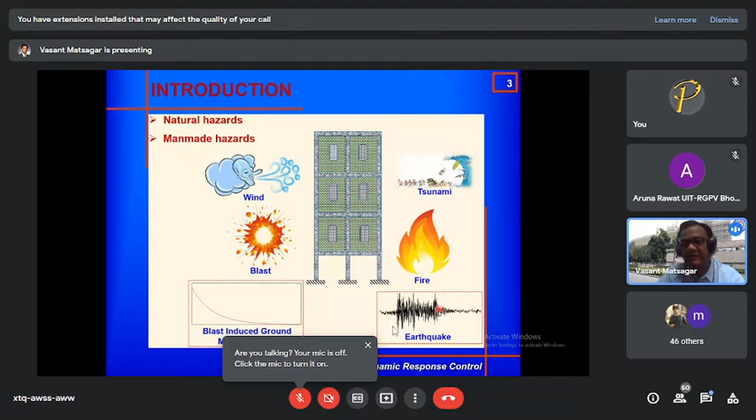However, before going there, I would like to mention clearly that these dampers or devices are used in structures not only for controlling response against earthquake-induced and wind-induced vibrations, but even for ambient loading conditions as well.

What are those ambient loading conditions? For example, when there are construction activities going on, the structure may experience some ambient vibrations. Or when there is a metro tunnel passing below a building, the building may experience vibration when the metro train passes by. Or if a heavy vehicle is passing on a nearby highway, the structure may experience some vibrations, and these are mostly called ambient vibrations.

So in addition to controlling the response of the structure against devastating earthquakes, it is also important to control the response—meaning minimize the response amplitude—against these kinds of ambient vibrations. I have already talked about windborne ambient and windstorm conditions, as well as earthquake conditions.

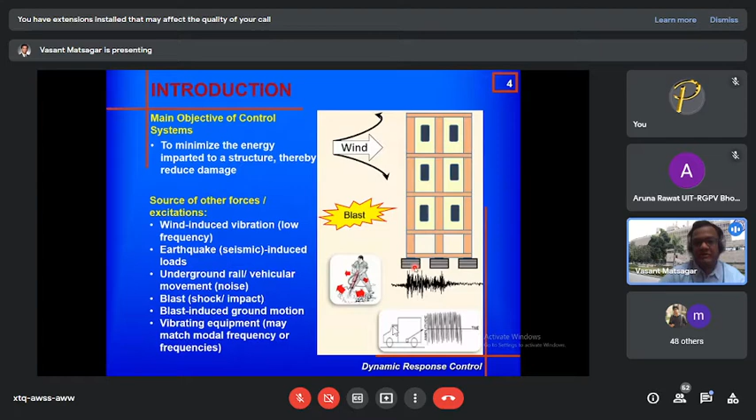Apart from that, I have talked about construction or transport activities that may cause vibrations in structures. There could also be surrounding industries and machinery that may cause vibrations, either from surrounding parts or within the structure itself—for example, diesel generators. These devices may cater for some of the forces induced on the structure because of these different sources of excitation.

So we categorize our excitations in a different manner, and then we write the governing differential equations for dynamic equilibrium of the structure, which essentially contain the mass, damping, and stiffness components. I'm still not at the matrices—I will talk about them in a little while.

However, in most structural dynamic analysis and design, we deal mainly with three matrices or three kinds of forces: inertial forces, damping forces, and elastic or stiffness forces. These days we do not call them elastic forces because we may have some inelasticity as well. On the right-hand side of the equation, we have the excitation forces.

Now, within this, mass and stiffness are typically explicitly known. This means we can calculate the mass of the structure by taking the volume multiplied by density. Stiffness is also explicitly known, meaning we can calculate it based on its material and geometric properties.

For example, if it is a column, we know the cross section. If it is a rectangular cross section, then using the moment of inertia bd cube by 12, and its length, depending on the boundary conditions, whether fixed, pinned and so on, and what modulus of elasticity it has, we can explicitly calculate the stiffness and subsequently the stiffness matrix. So both mass matrix and stiffness matrix can be calculated.

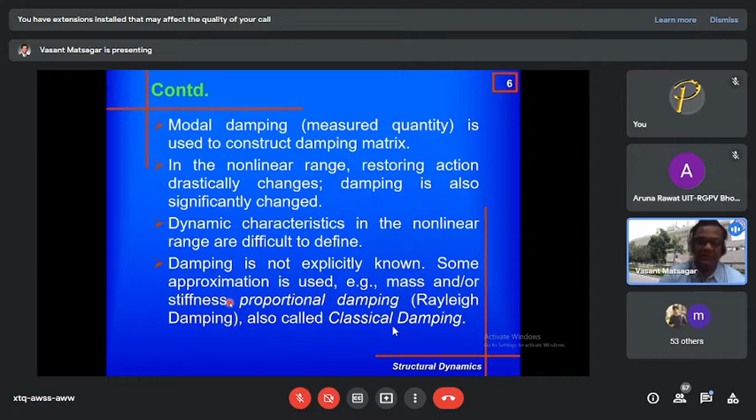The structure becomes non-classically damped. If we do not add that external damping, then it is called classical damping. This is something classically known, that it is assumed classically that the damping in the structure is proportional to mass and stiffness, until we add the external damping. So this is something we should know from structural dynamics.

However, in addition to that external damping, there is some damping coming either from the soil structure interaction part, or if you have combinations of structures. For example, you have bottom floors made of reinforced concrete, and after that one has added new floors, but those new floors added are made out of steel, so it is a hybrid structure. You have combinations of two different kinds of structures.

And thereby the mass and stiffness proportional damping, though it is present there, it is still in the category of non-classical damping, because the damping levels are different. Whereas reinforced concrete gives a damping level of about 4 to 5%, depending on how much cracking has been induced, the steel structures can give up to about 2% of the damping. So there is a difference in the damping in the structure.

Now that has a direct effect on the frequencies, or the modal values, or the mode shapes of the structure, which are the natural properties, because these are dependent on the mass and stiffness, and from that we calculate the natural frequencies of the structure, modal frequencies, by solving the eigenvalue problems. After that, we calculate the damped natural frequencies, and those damped natural frequencies, depending on how large the damping is, are affected, meaning they are shifted because of the presence of damping.

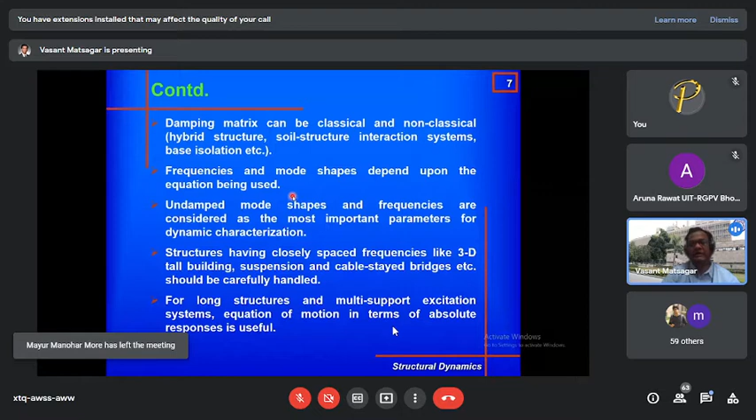Again, if it is a long or tall structure, the classical theories of structural dynamics based on the lumped mass approach may not be directly applicable, and we may have to tweak the equations of motion. So to summarize, there are different kinds of approaches available for developing the governing differential equations and solving them for response evaluation of structures, categorized into lumped mass systems and distributed mass systems or continuum systems.

In most cases, we still follow the lumped mass system. However, for some important structures, we may go with the continuum or finite element approaches, especially when we have soil structure interaction kinds of problems, or liquid structure interaction kinds of problems. There, the lumped mass approach becomes more approximate, and the continuum approach or finite element based approaches are more suitable.

In case of lumped mass approach, typically in buildings, the mass is lumped at the floor level, and the mass of the columns is added to the floors so that the columns only provide stiffness, while their mass is considered lumped at the floor level.

Even for a three-dimensional oriented building, where members are in all three directions of the structure, they can be modeled at each joint or node, and thereby the inertial forces are developed at the nodes while the stiffness forces are developed within the members, either in the vertical lateral load resisting elements, or in the beams.

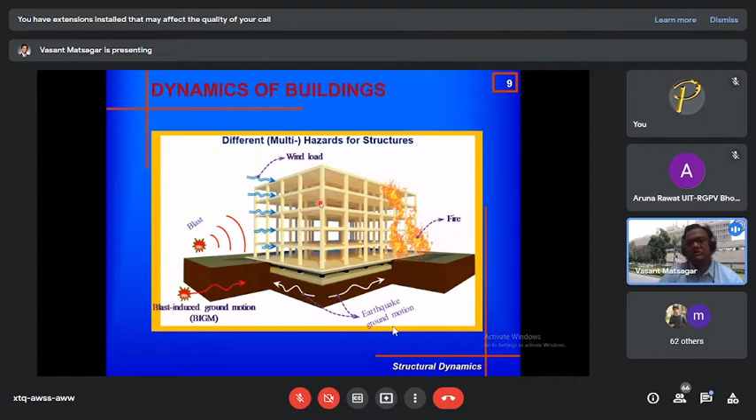For this kind of system, we develop the equation of motion for a multi-degree of freedom system under either base excitation or mass excitation. When I say base excitation, it is from the seismic case, and when I say mass excitation, it is from the wind case. Please note that in both these cases of dynamic excitation, the governing differential equation remains almost exactly the same.

The reason I'm saying almost exactly same is this: in case of seismic excitation, this is the inertial excitation, whereas in case of wind loading, it is a direct load which is applied at the nodes, if it is a lumped mass system.

Now, this equation, I'm sure most of you are familiar with. When we write the equilibrium equation for the entire structure, the right hand side is 0 in case of earthquake, because here we are talking about the absolute acceleration. That absolute acceleration consists of two parts: the relative part of the acceleration and the ground acceleration.

When we split this into two, there are two mass times acceleration components, one of them related to the ground acceleration. If we take that on the right hand side, it gives the negative sign, and then we rewrite that equation in this form.

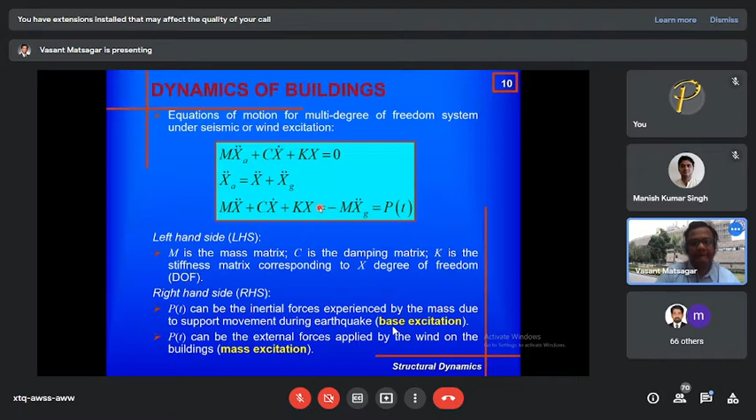Now, for long structures, typically such as bridges, there might be different kinds of excitation experienced at different piers, because the length is larger. There could be a 100-meter or 200-meter long bridge, and thereby we cannot take the same earthquake excitation received at each pier location.

In that case, we may change the excitation depending on how the ground is and how the attenuation is happening. So we have to change our equilibrium equation in a sense that we have different kinds of excitation received at different input points to the structure, different supports to the structure, such as long bridges or even long plan buildings, and that is called multi-support excitation.

Now, from this, if we take out the terms of the external excitation and damping, what we are left with is the natural properties or inherent properties of the structure, such as mass and stiffness. They are independent of the external excitation. Now, if we express it in the form of an eigenvalue problem and solve it, what essentially we calculate are the modal frequencies and mode shapes. Now, why are they important to us?

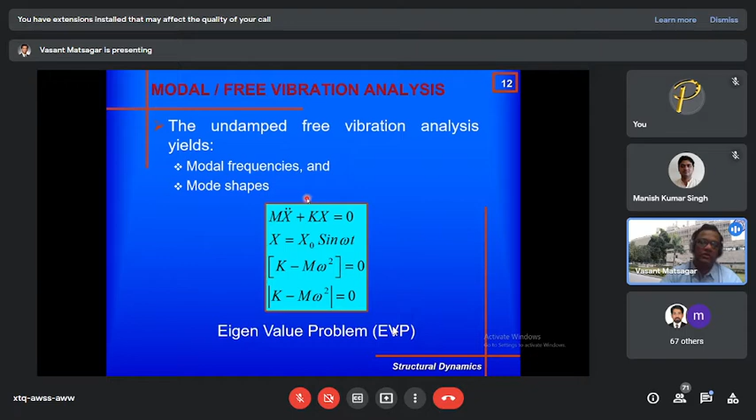Or when we add, let us say, a tuned mass damper on the structure, there is change in the modal frequencies and the fundamental mode. If we are controlling the first modal response, then we split into two modes and we have different modal quantities corresponding to the first and second mode. So that we will see in the subsequent slide.

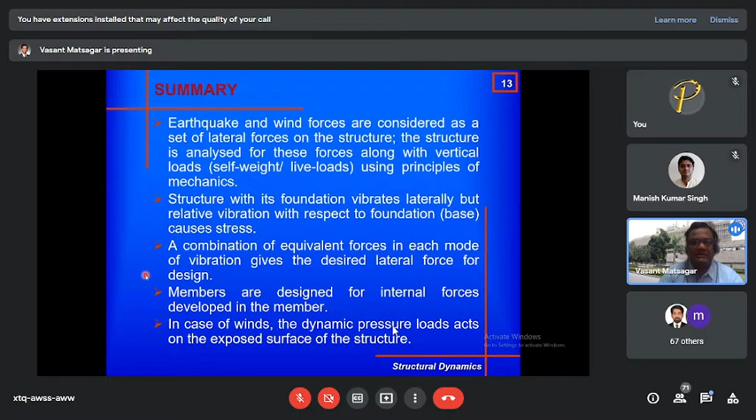So mostly I have talked about the base and mass excitation and how we calculate these different quantities such as mass, damping, stiffness, and then our objective is to control the dynamic response or vibration response of the structure. So most of these things I have already talked about. This only summarizes the structural dynamic concepts.

Now, there are two parts again, the mass excitation and base excitation. In case of mass excitation, we calculate what is the load acting at different nodes if it is a lump mass modeling approach, by multiplying the pressure applied by the wind on an exposed surface and then calculate the force acting at that level. Typically, it has this kind of a profile because of the friction with ground and trees that are there beneath. But otherwise, we get almost the maximum velocities here, which are free velocities, and thereby we get uniform high pressures at the top.

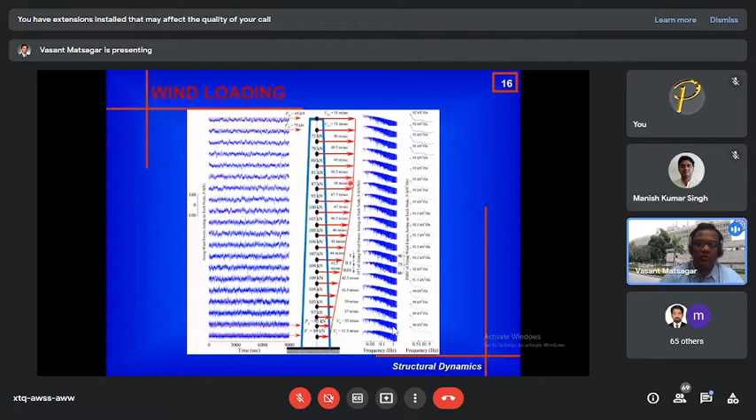So this is especially important for tall structures. For low-rise structures, though, they are more prone to earthquake rather than wind, which is the focus of today's presentation. So in case of earthquakes, there are different kinds of earthquake ground motions depending on what site we are talking about.

So all these characteristics of the accelerogram of earthquake ground motion have direct effect on how the structure would respond. Typically we quantify it in three terms. One, the maximum acceleration in an earthquake first. Second, what is the frequency content? For example, here the frequency content is lower as compared to this. There are a lot of high frequency components involved in this excitation. And the third and last one is the duration.

Now, these days duration is also becoming important. Earlier, it was not per se a design parameter, but now there are certain areas where long duration earthquakes are becoming more and more prominent. For example, in Japan, they are expecting an earthquake which may even last for 15 to 20 minutes or even maybe 30 minutes, half an hour. So that becomes quite important because there is a lot of to and fro motion happening.

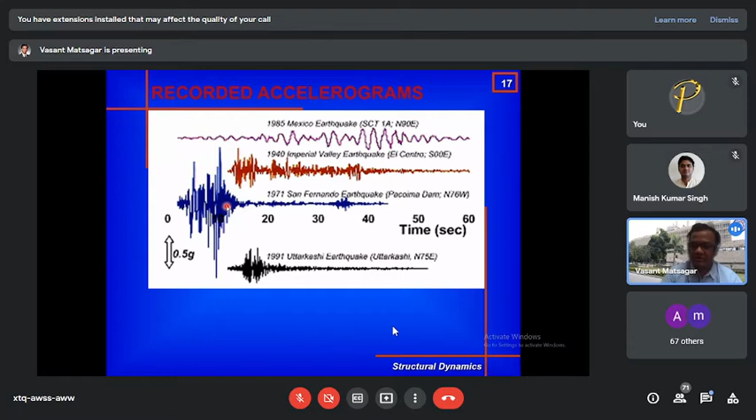So if we have a look at our Indian standard codes, and for that matter even worldwide also, most of them do not much worry about the long duration earthquake. However, indirectly these codes and standards deal with the frequency content. I am saying indirectly, but they directly deal with the earthquake intensity measured in terms of the peak ground acceleration. So the intensity parameter that we essentially take into account in the structural design is the peak ground acceleration. So whenever we have some time history, we focus on the peak ground acceleration and then start designing our structure as well as the response control devices based on how the structure is responding to a given intensity of an earthquake.

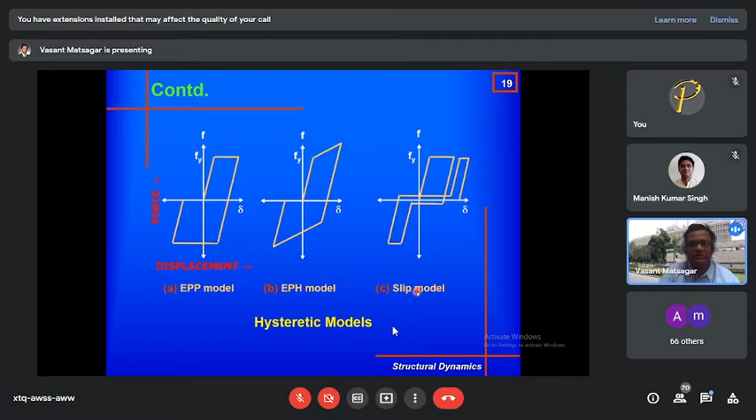Now, how do we incorporate these devices in the structure? First, I'm showing some failures, and then we learn from them and how we protect the structures by adding external devices. What you see here is a bracing system which is conventionally put in place.

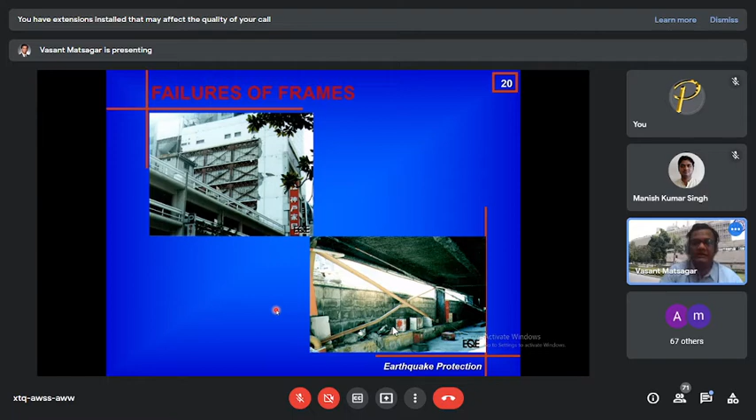In most cases, in the rural parts, we have non-engineered structures built by masons or those not trained in construction, and during earthquakes they experience catastrophic failures, causing a lot of death toll. Even some so-called engineered structures experience collapse because, though they are engineered, the best practices of earthquake-resistant design have not been followed in their design and construction.

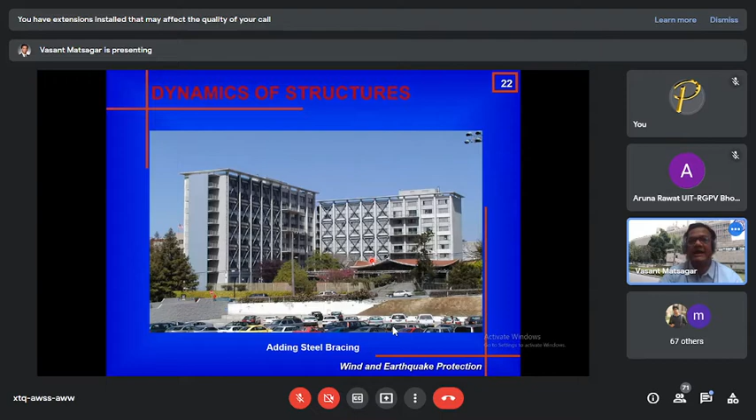Whereas if we see structures in seismically advanced countries such as Japan or the US West Coast, California region, they have adopted the best practices in earthquake-resistant design, and by constructing those structures to be earthquake resistant, they are able to save both human lives and loss of property and business. This is done either by using conventional approaches of earthquake-resistant design, or by using some of the advanced devices, which is what we are going to focus on today.

So how do we control the response of the structure? We do that either by increasing the flexibility of the structure in the seismic case, so that on the response spectrum, we move towards the part where the spectral ordinates are diminishing or lowering down.

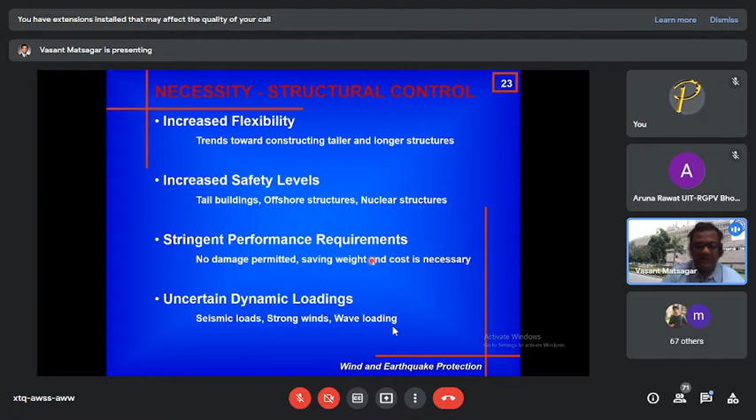In addition to that, for ambient cases and earthquakes that are not so intense, meaning their PGA is lesser, we may also look into serviceability conditions, whether serviceability is met or not. We also have predictive models wherein we check the possible earthquake excitation at different time steps, and for that we design these response control devices so that they help not only during the extreme earthquake case, but also in ambient conditions. There is a lot of uncertainty involved in this, which we do take into account. A detailed discussion on that we will have sometime later.

So focusing particularly on the fundamentals of vibration control and how we use them in our buildings and structures.

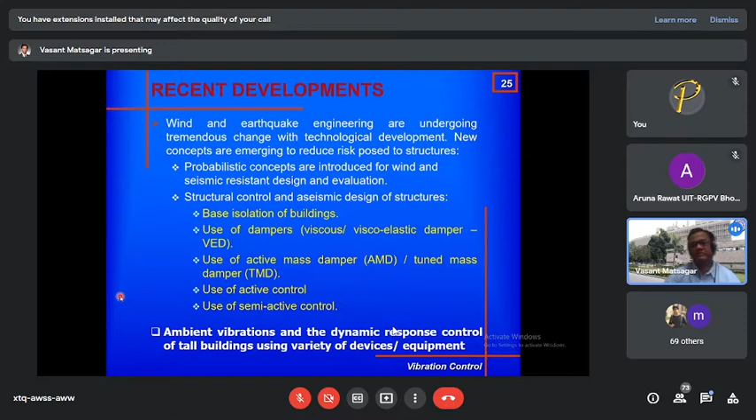Typically, we incorporate some device in the structure in the form of either a bearing or some dampers, like the shock absorbers we see in automotives, cars or bikes. Or we put tuned mass dampers on the structure. All these passive devices, having no external input, such as base isolation, dampers, or tuned mass devices, can be converted or put into semi-active or active mode as well - I will talk about that in a little while. These devices may function for both purposes, or separately, for ambient vibration conditions or extreme vibration conditions, either because of earthquake or wind.

Now, these days we worry about the performance of the structure during different levels of earthquakes, which falls in the category of performance-based earthquake design. So even in structural response control, we are in a position to look into what are the different damage states and what performance level threshold we are achieving by incorporating these devices in the structure.

Typically, for lifeline structures such as hospital buildings, we always anticipate that it should have operational level of performance. It means during and after the earthquake, the hospital should remain functional without requiring any maintenance or rehabilitation. So even for hospital buildings, we in a way do not prefer immediate occupancy as well.

What immediate occupancy means is that during the event, ongoing activity or excitation, occupants of the building are evacuating, going out. However, after the event is over, they come back and start using the structure without requiring any rehabilitation. However, just imagine for a hospital building, the patients residing there - depending on their health condition, they may not even be able to go out of the building. They may just remain there. It will take a lot of time for them to evacuate, and by then the earthquake might even be over. So for hospital buildings in particular, it is recommended that we have the operational level of performance.

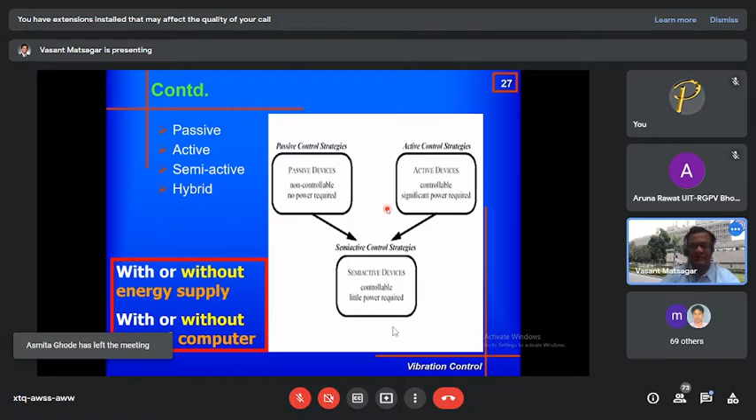Okay, I have already covered this part, so I will go ahead.

So there are different kinds of vibration control devices available, such as base isolation. Again, there are different schools of thought, particularly in Japan - they do not consider base isolation as a vibration control device, but in my opinion, base isolation is also a vibration control device. However, there is no difference of opinion insofar as viscoelastic dampers, tuned mass dampers, or multiple tuned mass dampers are concerned - they are all vibration control devices.

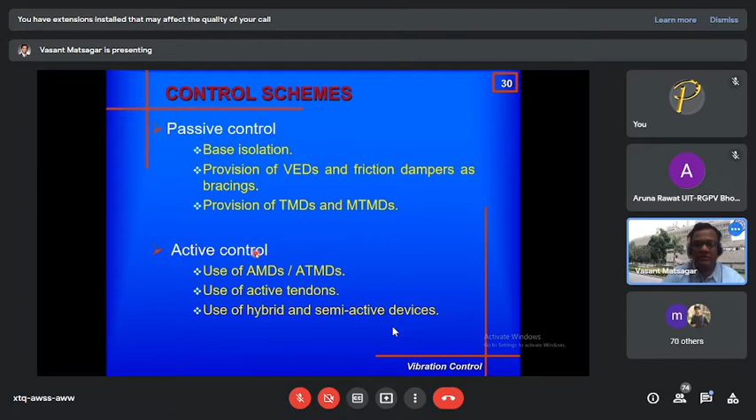If we have their inherent properties used in vibration response control, then they fall in the category of passive control. If we have their properties changed during excitation as per the requirements, then they are called active or semi-active control devices, depending on what power input is required.

And typically when you have large energy dissipation, essentially you are talking about nonlinearity in the structure. The more the nonlinearity, the more the area under the force deformation loop, the bulkier the hysteresis loop, the more the energy dissipation and the more protection we can obtain.

Now, that kind of nonlinearity or higher damping can be introduced in the structure in a large number of ways, and it would become a very exhaustive long list to cover all the different approaches. However, some salient names have been taken here, such as tuned mass dampers, liquid column dampers, MR dampers which are magnetorheological dampers, or electrorheological (ER) dampers, then active mass dampers, smart dampers, and so on and so forth. There are a large number of such devices available.

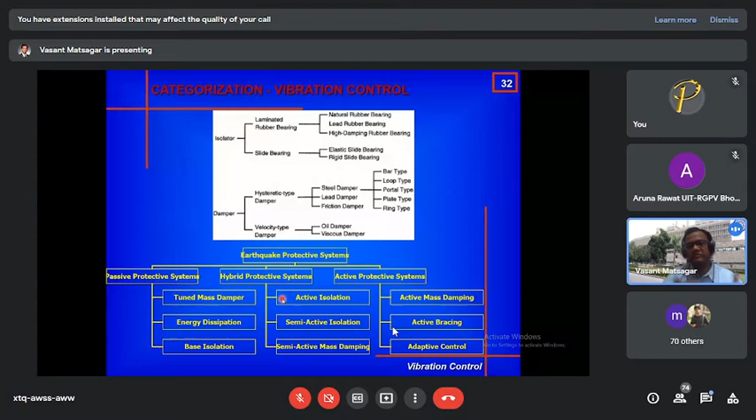Once we choose one particular damper out of these different possibilities, we can design our structure accordingly and see how it responds. While choosing that device, essentially what we are adjusting or manipulating is either the mass of the structure, the damping, the stiffness, or we are not allowing the external excitation force to enter the structure, like in base isolation, or we apply certain external control force.

So essentially, from the structural dynamics viewpoint which I talked about in the beginning of this class, we are playing with the mass matrix, the damping matrix, the stiffness matrix, and the excitation force on the right hand side of that governing differential equation. Overall, what we have in our hand to control the response of the structure is that simple equation.

You have three terms: the inertial force term, the damping force term, the elastic or restoring force term, and the external excitation. You can play only with this, and typically it is better to play with the damping—so in some cases we call these damping devices.

Essentially we do not worry much about the mass, because the mass of the structure remains the way it is, and the seismic forces are proportional to the mass. So typically, in order to reduce seismic forces on the structure, we tend to have lighter mass structures as much as possible, but that depends on the materials we are using.

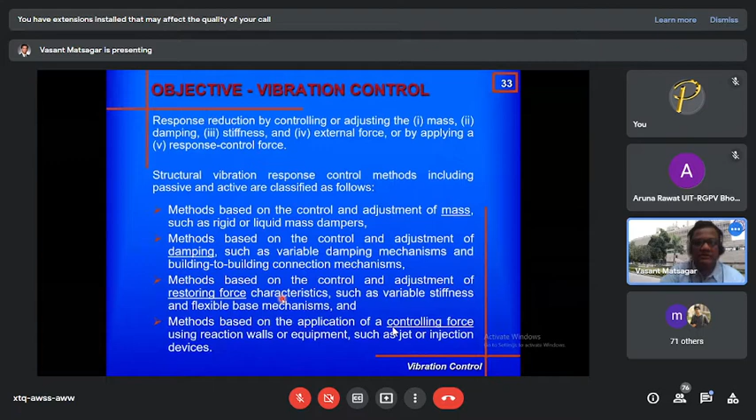But increasing the damping capacity and changing stiffness to some extent are really possible. Avoiding the external excitation from reaching the structure is rather challenging, and applying external force is also very challenging for tall and massive civil engineering structures. So the focus still remains on changing the damping and stiffness of the structure.

The other option is the tuned mass damper. We can install the tuned mass damper at an appropriate location—the most favorable location is at the top of the structure, which experiences the largest displacements.

If that tuned mass damper is fitted with some active or semi-active device, then its properties can be changed during the excitation stage itself, so that we achieve larger response reduction or greater vibration response control. Or we can have some bracing systems or active tendon systems—AT stands for active tendon.

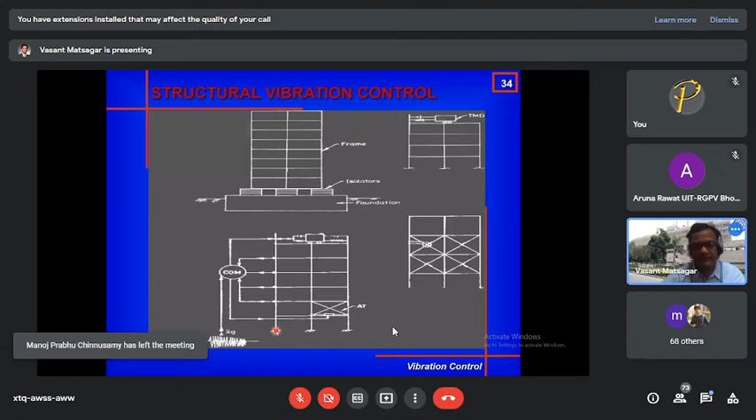These can be simple accelerograms which measure the ground acceleration, xg double dot. In addition, there could be other sensing devices sensing the floor response, such as floor accelerations or velocities. For example, accelerometers installed at the floor level have their measured quantities fed to a computer.

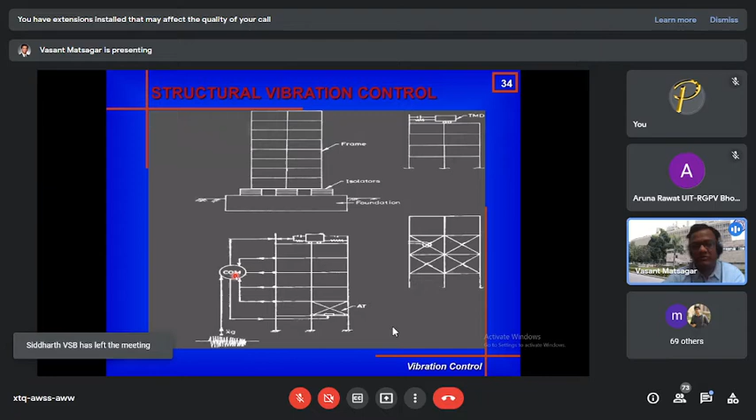The arrow is going towards the computer. Ground acceleration is measured by the accelerograms and fed to the computer. So the computer has received as input the data of external excitation as well as the response of the structure — the floor response of the structure. That is the input.

Based on that, we do some coding. We write a program: given this excitation and these floor responses for a given structure, what should be the control force? We calculate that in real time when the actual earthquake is happening, then give feedback control to our devices dictating the dynamic properties — how the stiffness should be, how the damping should be. Changing the mass during real time is rather challenging.

Because of that change in stiffness and damping, we can further reduce the response of these floors in subsequent time steps. So we give that feedback signal, or control signal, to control the response of the structure by changing the properties of the control device — and therefore it is called active or semi-active control.

Similarly, as you can see here for the active tuned mass damper, we send the signal to the active tendon system and dictate how the tendon should behave — which one should be taut, which one should be slack. For example, there is an actuator here, and we give that signal to the actuator. If this building is moving to the right of the observer, we would like to pull this tendon back, not allowing it to displace further right. This means the actuator will move from right to left, pulling the tendon so the structure is not allowed to go right.

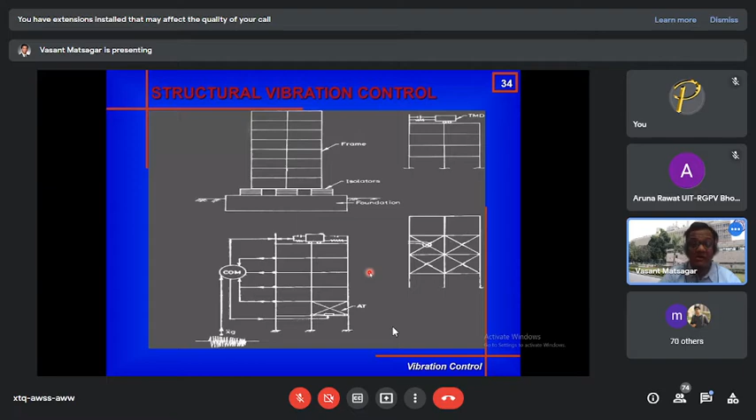Before I go any further, have I been able to explain how this semi-active or active response control works? Because the rest of my discussion on active control will mainly revolve around this. Any questions so far? No quick questions? Okay, I'm glad I was able to explain this with a lot of clarity.

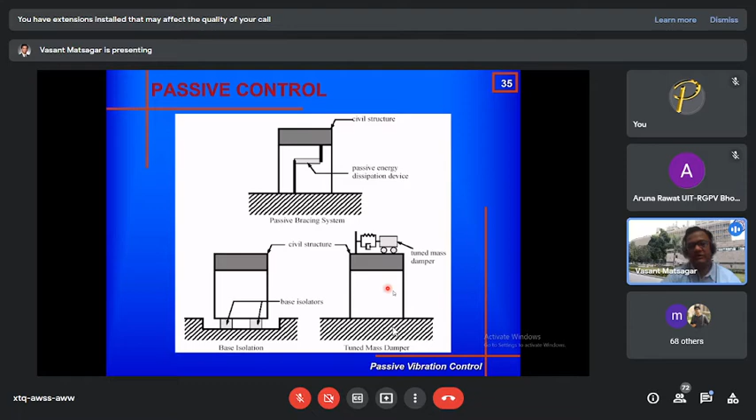These are schematics showing how passive bracing systems, base isolation, and tuned mass dampers are represented and how they function, which we will see subsequently. For any civil infrastructure, we can install energy dissipating devices — passive, semi-active, or active — in the form of dampers internally, base isolation systems to separate the structure from the oscillating ground, or tuned mass dampers installed on top.

So out of this, I will first talk about the tuned mass dampers, then I will talk about the other dampers, and tomorrow I will talk about the base isolation.

Tuned mass dampers are a very classical device based on the fundamental principle of structural dynamics, which is resonance. The parent structure could be a multi-story building or a bridge. When subjected to earthquake excitation or live load, such as vehicles moving, the bridge starts oscillating. That entire structure can be represented as a multi-degree of freedom system, which can be converted into an equivalent single degree of freedom system.

This MCK - mass, damping and stiffness - is representative of that equivalent single degree of freedom system of the parent structure, whose response is supposed to be controlled: displacements, accelerations, and velocities to be reduced. Typically, in flexible structures, displacements are what we need to control. For that purpose, we go with displacement control devices rather than force control devices. Tuned mass damper is one such device typically used for displacement control.

In a tuned mass damper, we have a certain mass installed on top of the structure, connected to the structure by some stiffness and some damping. That stiffness, damping and mass corresponds to the tuned mass damper.

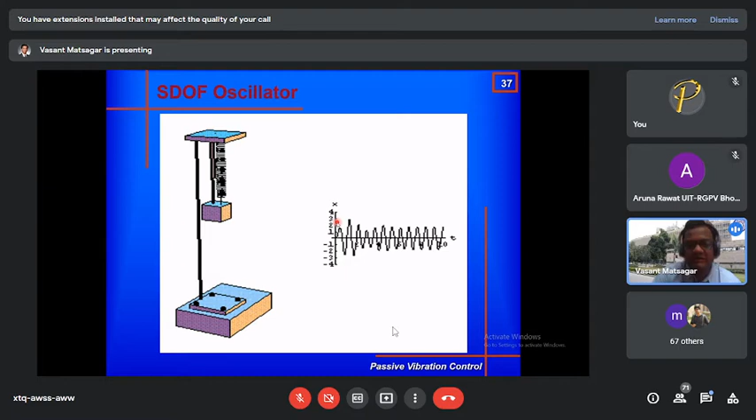Again, this is a representative structural dynamic picture where you have a single degree of freedom system. There is some excitation here in this direction - it doesn't matter which direction for our discussion. This is the larger uppercase mass, and uppercase X is the displacement. There is some stiffness element and some dashpot or damping. Under this excitation, the amplitude in whatever unit is somewhere around 3 units.

Now why does that happen? It typically happens because when this mass is moving in one direction, let's say upward, because of the inertia of the small mass, it tends to move in the downward direction. This means it resists the upward movement of the main mass. In the next time instant, when this mass is going down, because of the inertia, the small mass relative to it will come closer - meaning it is moving upward and applying a force opposite to the motion of the main mass.

Now, because of the tuning, because their frequencies have matched, they will always be working against each other, and there will be a phase difference of 180 degrees. It means if this main mass is going down, the auxiliary mass, the tuned mass damper, will go up. If this is going up, meaning the main mass is going up, this will go down. And it will keep on happening because their frequencies are the same.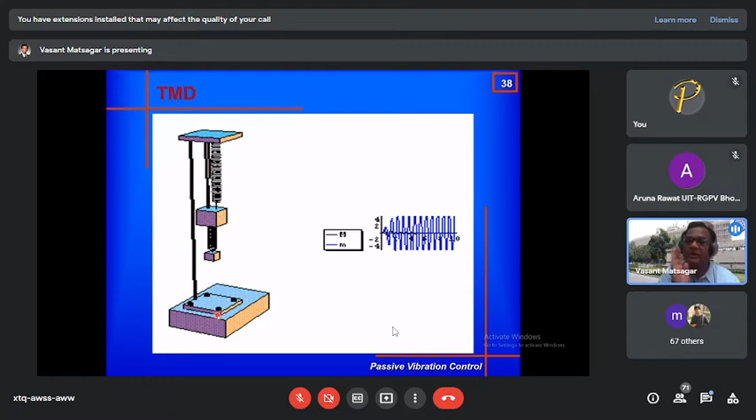Even in real life construction, if time permits, I will talk about how we control the response by having perfect tuning, perfect frequency matching, so that there is a resonance. Please note that when there is resonance, we typically say the structural response amplifies, and it is not advisable to have resonance in a dynamical system to control the response. Here, we are actually using resonance to control the response of structures. So this is one of the most attractive passive vibration control devices used to reduce vibrations of the structure, based on the principle of structural dynamics resonance concept in a way.

So that was from the structural dynamic perspective. But in real life, how do we have them installed on buildings, particularly tall buildings, which experience a lot of lateral oscillations, either because of earthquake or wind? One may argue that typically tall buildings are not much sensitive to, or their design is not governed by earthquake, their designs are mainly governed by wind. Yes, it is understood, but right now that's not the point of discussion.

The point of discussion here is, no matter whether it is a low-rise building, mid-rise building, or tall building, how these different control devices help in mitigating or abating the vibration response. So in case of tall buildings, the most preferred location for installation of the tuned mass damper is the topmost floor, which experiences the largest vibration amplitude.

Now, in the subsequent slide, what you will see is that when there is some excitation, either in the form of base excitation or wind excitation, the uncontrolled building, the one not fitted with the damper, experiences large vibration amplitudes, whereas this building's response is reduced and the tuned mass damper works. However, it takes some time for activation of the tuned mass damper, because the earthquake excitation in particular takes some time to reach the top of the structure.

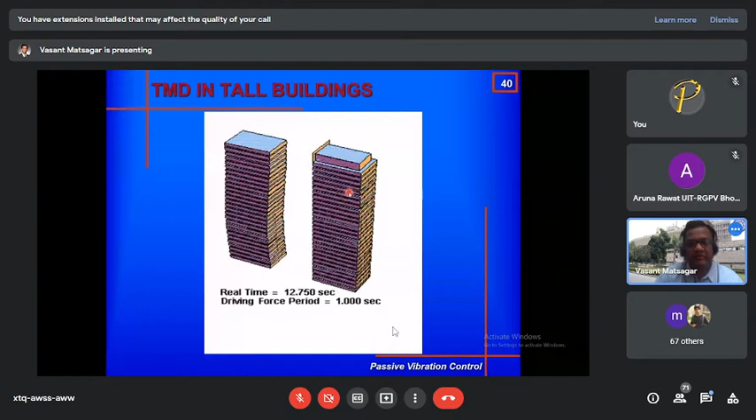This is again rewinding. So after rewinding, you can see that from the beginning they experience a similar kind of excitation, and later on this keeps oscillating, but the building oscillation reduces down when the tuned mass damper is used.

So quickly seeing how the damping is enhanced: this is not material damping. This damping is a different kind introduced to the structure, and it is quantified in terms of effective damping. So when we have exact matching of the frequencies, we get high damping, high effective damping. And if there is no matching of frequencies, meaning detuning happens, then the damping reduces, and there is even a possibility that it goes negative.

It means instead of reducing the amplitude, it increases the amplitude. But anyway, that's not again the point of discussion. Also, if we have a larger mass put on top of the structure as a tuned mass damper, it gives better effectiveness in terms of increase in damping.

However, there is a limitation. Just imagine a huge mass is to be put on top of the structure—you have to carry that huge mass up there, which is very difficult. There are some practical limitations, but if the mass of the tuned mass damper is comparatively higher than the modal mass of the structure, then we get higher response reduction, higher damping, higher effective damping in the structure. Typically, for a perfectly tuned structure, you get better response reduction. But please note that the peak is not at 1, it is slightly lower than 1. I will leave this as an open question if somebody would like to know the reason behind that.

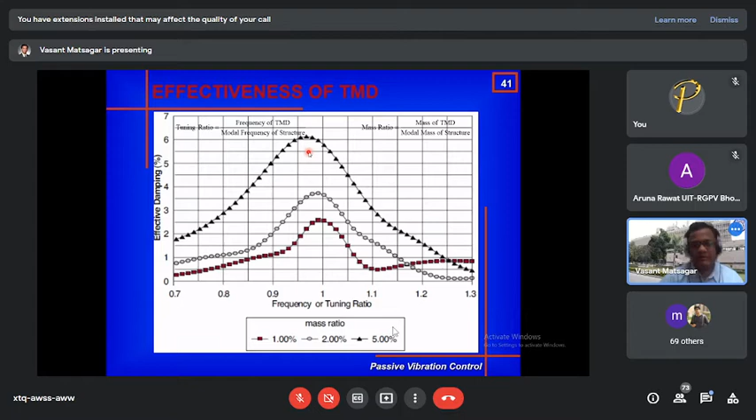These kind of tuned mass dampers have been installed in different kinds of structures across the world. Typically, they are more popular for relatively tall structures such as air traffic control towers. Even in Delhi, at the airport, the response of the air traffic control tower is being controlled by a tuned mass damper. Similarly, some tall buildings like the Hancock Tower in Boston, or Sydney Tower City Center, are all controlled by the tuned mass damper. So that is one kind of damper.

Another kind of damping device used for dynamic or vibration response control of structures are the viscous dampers, viscoelastic dampers, friction dampers, yielding dampers, and so on. There are a large number of categories. I have taken only some for example purposes. Within viscous dampers, there are different categories. In viscoelastic dampers, there are different types, or friction dampers or yielding dampers, as many as we may not be able to cover in today's discussion.

But I'll give you a general philosophy of how they function or work and help in vibration response reduction. Essentially they increase the damping in the structure, and as I have said earlier, because they have been externally added, it is not proportional to the mass and stiffness, so they convert the structure into a non-proportional or non-classically damped structure. Most of the energy is dissipated, which is the area under the force deformation curve, through some mechanism, and that mechanism depends on what kind of damper we are using.

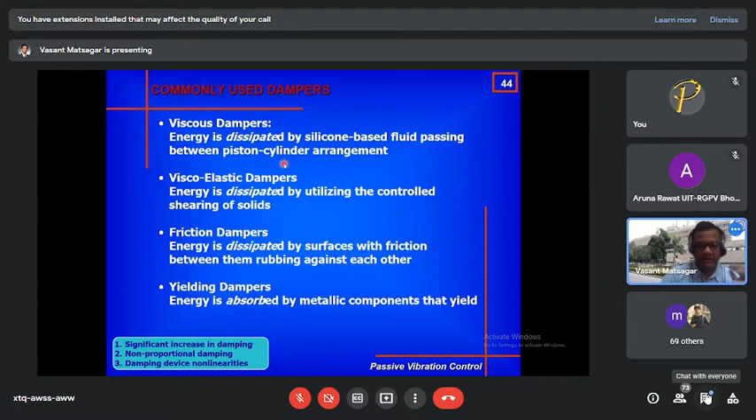Let's quickly see how they internally look like. First of all, the viscous damper. It is exactly the same as what we see in our day-to-day automotive vehicles, such as cars or bikes, where you have the shock absorber, or sometimes it is also called shock ups. It has a cylinder, and within that cylinder there is a piston. That piston divides the cylinder into two chambers, two compartments, and there is a viscous fluid in this.

Typically, silicone is used, and there is a relative displacement between the two. If there is no relative displacement, the piston is at a static position. But when oscillations take place, this piston starts moving inside the chamber, and there are typically some orifices here, and the compressible silicone fluid moves from one compartment to the other, and in that process, because of the viscosity in the fluid, there is energy dissipation, a large amount of energy dissipation.

You can see that there is no change in the stiffness of the structure. It means the modal frequencies will remain the same, the natural mode shape, natural modal frequencies. However, damped natural frequencies will change because now a huge amount of damping has been added. How huge? Typically, in case of steel structures, it is about 2% damping. For concrete structures, it is 4 to 5% damping.

Whereas these viscous dampers can give you a damping of even 10%, 15%, or even as high as 20%. It depends on how these damping devices have been designed.

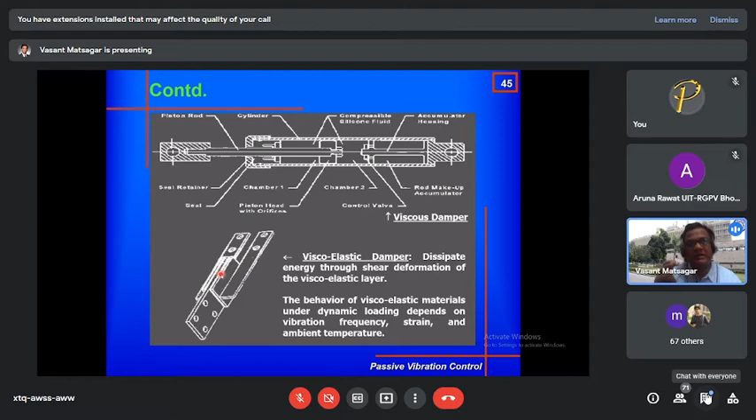Typically, it again gives higher damping, maybe not as high as in the viscous damper, but relatively higher damping. So in this case, all the dynamic properties of the structure are changed, including the stiffness matrix and the damping matrix together. Apart from that, there are several other devices which it is not possible to cover all in one or two hours.

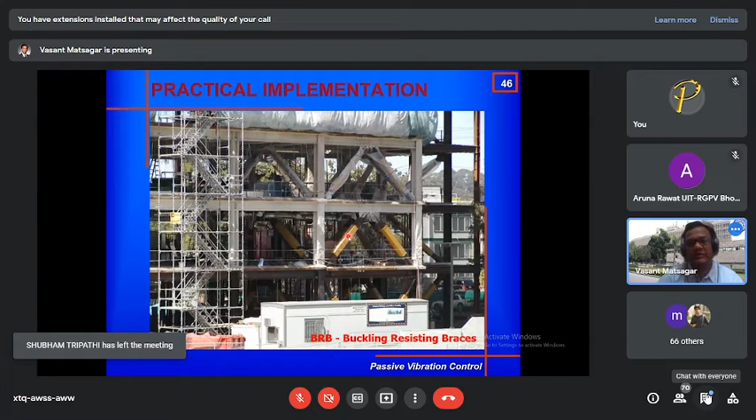But still, some of the popular devices are the buckling resisting braces, or BRBs. In this, there is a buckling element, typically steel, and when you apply some compressive force on that, there is buckling in higher modes. In that process, because it is a nonlinear or inelastic buckling, there is energy dissipation.

Now one can think of having fabricated these friction devices in very different manners. So there are a very large number of friction based devices which dissipate energy.

Some of the challenges in these kinds of friction dampers is the restoring. After the earthquake is over, there is a tendency that whatever displaced position the damper is in, it will remain there. So you may require some external effort to bring the structure back to its original position.

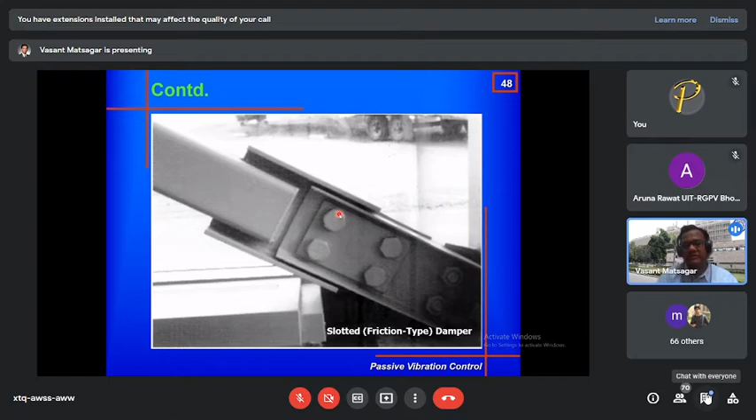So these are some of the limitations, and there are some efforts being made to put them in a hybrid mode so that some restoring devices are added. At IIT Delhi, we have developed some such systems where restoration has been added to the friction dampers. So I talked about the viscous dampers, I talked about the viscoelastic dampers, I talked about the friction dampers.

The next devices are based on energy absorption, which I have said is one of the categories in which there is yielding of some material. That yielding of the material could be at some location which is the weakest location.

So this kind of damper is called X-plate damper, or it is also called the added damping and stiffness device, where we deliberately reduce the cross section, meaning we create a weaker zone. And obviously when we apply certain load on this plate, it has a tendency to fail at a location which has the least area of cross section.

So there is yielding at this cross section, and a large amount of energy is absorbed here. We design the thickness of this plate such that for the design basis earthquake, whatever earthquake force gets induced here, it should yield. We are deliberately making it fail so that during the failure process, it absorbs large amounts of seismic input energy, and that energy does not go anywhere else, so the other members do not receive that seismic energy and do not fail. So we concentrate the failure location at one place, in this device.

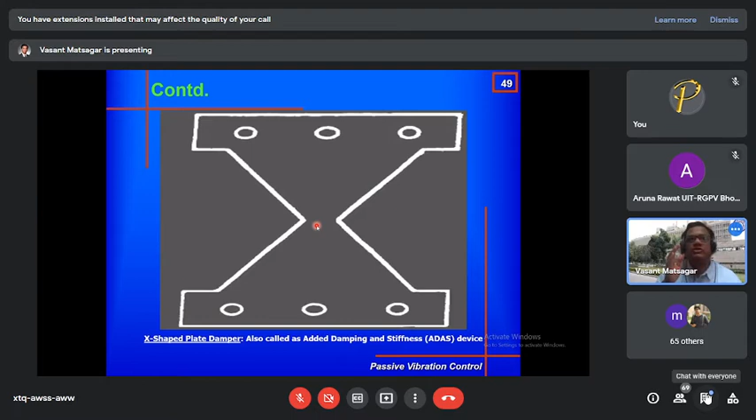It means the other members have not received high seismic forces. However, what would happen to the acceleration? What would happen to the displacement? We have not looked much into it. So when we talk about vibration response control of the structure, if we are careful about what is happening to displacement, velocity, acceleration, and seismic forces, we will find that not all devices are helpful in controlling everything.

Some devices are able to reduce the displacement, for example, but at the cost of maybe higher acceleration. For example, if we add more stiffness to the structure, the displacement reduces because there is higher stiffness. However, higher stiffness means the frequencies have increased, and higher frequencies typically have higher accelerations associated with them.

Now, if we would like to have both accelerations and displacement reduced, a device which only improves displacement response control by adding only stiffness is not useful. We need stiffness and damping together. The damping might be able to reduce the acceleration, and the stiffness might be able to reduce the displacement and drift in the structure. So that is where the design of these devices becomes very important, as to what your control objective is. The control objective could be reduction in all of these dynamic quantities, so the design of these passive response control devices becomes important.

Apart from some of these devices, there are certain other control devices available, such as the tuned liquid column damper, in which a U-shaped tube is installed on a floor of the structure, typically the top floor, containing some liquid. There is a diaphragm having an orifice, and when there is oscillation, when that floor experiences excitation, because of the inertia of the liquid inside, there is a change in the liquid column from one side to the other.

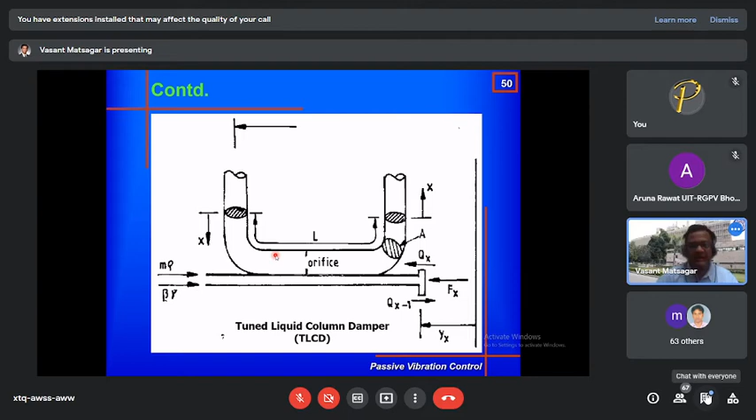So those were mostly the passive control devices. Their stiffness and damping do not change in real time; they remain what they are. But I have given you one example earlier as to how we put active control or semi-active control systems in our structures or in the dynamical systems.

So the same is shown schematically here. For example, we have this tuned mass damper, and there are certain sensors put in place. The sensors could be measuring the ground excitation or the floor responses. We give that as an input to the control computer, and then the control computer generates the control signal, which goes back to the device, and the properties of the device change in real time.

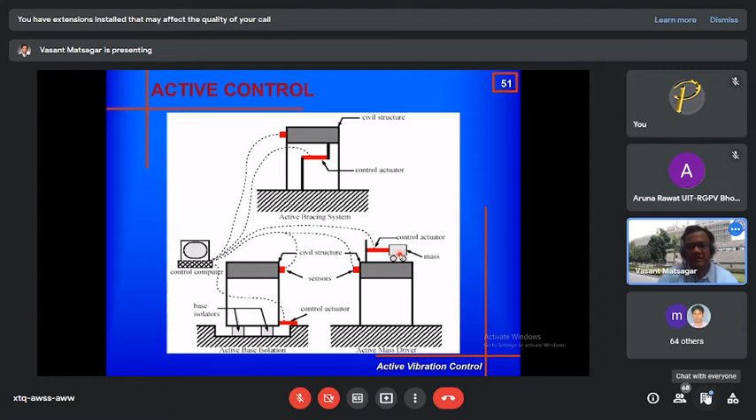So in a semi-active or active control device, sensors are essential. Those sensors give input to the computer, and then that computer generates the command signal, and that command signal is given to the controller, which changes its mechanical properties during real time.

Now, some quick discussion on active systems and semi-active systems. We have borrowed some of these ideas from electrical engineering, so I have converted those terminologies into civil or structural engineering terms.

So we have a dynamical system whose response has to be controlled, and that is the structure. That structure receives some external excitation, meaning it responds to seismic or wind excitation, and our objective is that whatever forces are developed in the structure need to be controlled. They can be controlled by different means, but one of them is the active mass damper. We install the tuned mass damper on top of the structure, and we change its properties in real time, and therefore that tuned mass damper is called an active tuned mass damper, or only active mass damper.

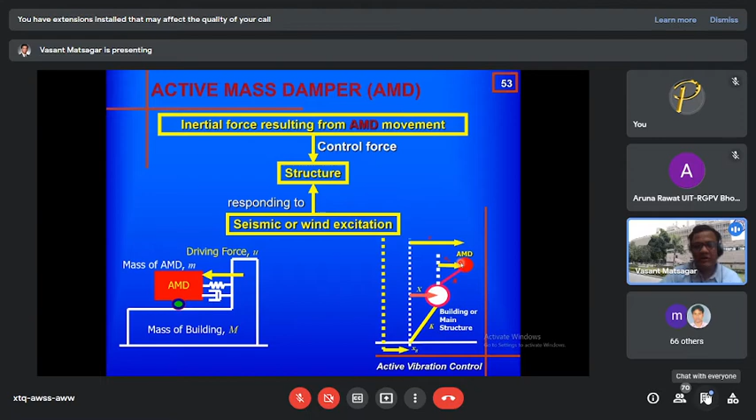Now this is looking like more of a theoretical discussion. However, in practice, these kinds of active mass dampers have been used in real life structures, especially in the Japanese area. So there the modeling of the structure is again slightly different from what we have seen in today's class in the beginning.

We have a lumped mass matrix, a lumped stiffness matrix, and a damping matrix. It is added with the additional mass of the tuned mass damper and the corresponding acceleration, displacement, and velocity terms, or vectors. And then you have the external excitation. Now you can either add them here, or you can add them as a separate control force—it really doesn't matter. But you have added one additional degree of freedom, which becomes part of your governing differential equation.

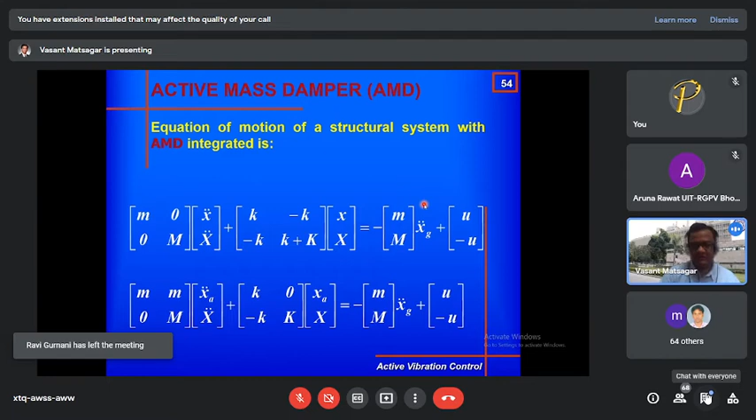Please note that as many degrees of freedom you have considered, the order of these matrices and vectors will become as much as that. And if you have an additional degree of freedom corresponding to the tuned mass damper, that will come in here. Now, in addition, if you have some control force, that control force can either be directly shown in the mass, stiffness, and damping, or it could be separately shown as u and minus u. Again, it is only a mathematical way of representing how the different forces work together. Essentially, what we are talking about is, in the time domain at any particular instant, what are the different forces by which the system is in dynamic equilibrium.

Without going into the detailed mathematical derivation, finally we get an equation which looks like this, where you have your masses and stiffness. Damping can be appropriately added, and it doesn't really matter if you are using Rayleigh or Caughey damping here. Then you have the external excitation forces acting on the structure.

Now, I was talking about the main parent structure, and those equations are developed for it, which receives some external input, and we control the response of the structure by some external force. That external force could be through different means, either external actuators or a device placed on top of it, which controls the response of the structure.

The parameters of that external device are changed in real time based on the response the structure is giving, because our focus is on controlling the response of the structure. So we have sensors that measure the response of the structure, we give that as feedback to the controller, and the controller keeps changing its properties so the response of the structure is reduced. So the plant is the structure whose dynamic response is to be controlled.

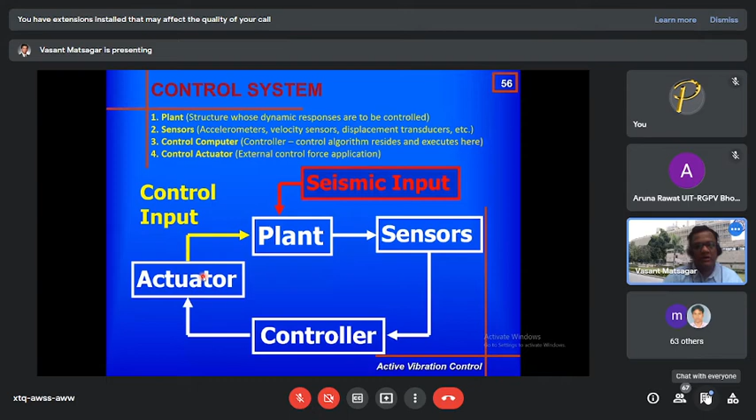The control computer and actuator are a computer and actuator which has to be triggered. Those who work in laboratories would know these terms, that there is some kind of data acquisition system and an actuator. That data acquisition system also has a computer as part of it, and that computer processes the data received from the sensors and gives the voltage signal or control command to the actuator, which controls the response of the plant, meaning the original structure.

In that there are different control algorithms, the way we control structural response in an active or semi-active system. Some very fundamental illustrations are given here for your understanding; the details can be gone into later. On the frequency scale, we can check the change in frequencies of the structure, expressed in the form of a transfer function.

So the transfer function for the plant can be expressed, and we see what is the feedback gain in a feedback control algorithm, and check how the transfer function is affected because of the control input given through the feedback gain. Here we talk about the controller, and here about the structure, based on whatever feedback control we are giving to the structure.

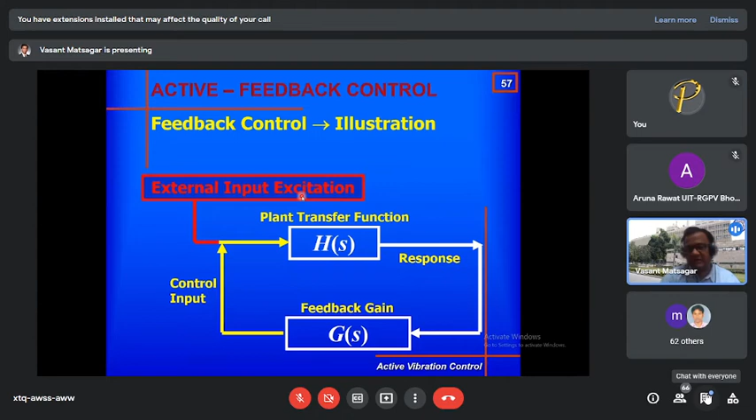We may make the external input excitation part of this, or exclude it without knowing the external input excitation as part of the control algorithm. There are different ways of doing this. For example, we can have the external input excitation directly given in the algorithm, and then we control the plant transfer function, with the response controlled through the gain signal—that is called feed forward control.

There are different ways we can have this control; I'm not going into greater details of that. However, it is a designer's choice which algorithm to put in, depending on what kind of structure it is, what performance is to be achieved, and whether it is displacement control, velocity control, or acceleration control, and the hierarchy of which of these are most important to be controlled and which are not so important or even not to be controlled.

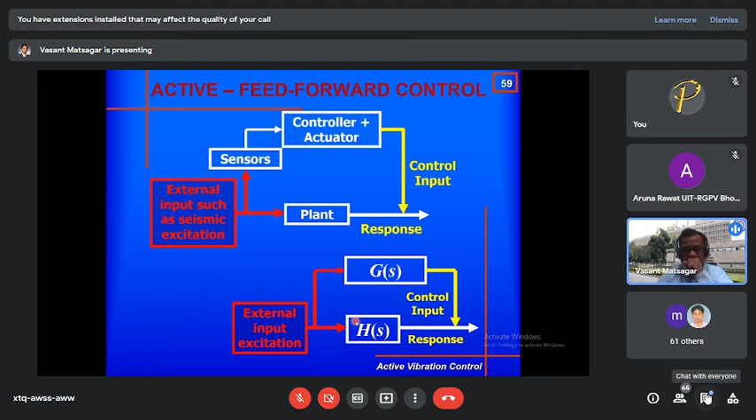One may think these are all theoretical discussions, mathematically oriented and look very nice on paper, but it's not so. There are a large number of buildings being controlled using some of these advanced devices, but mostly in the seismically advanced countries.

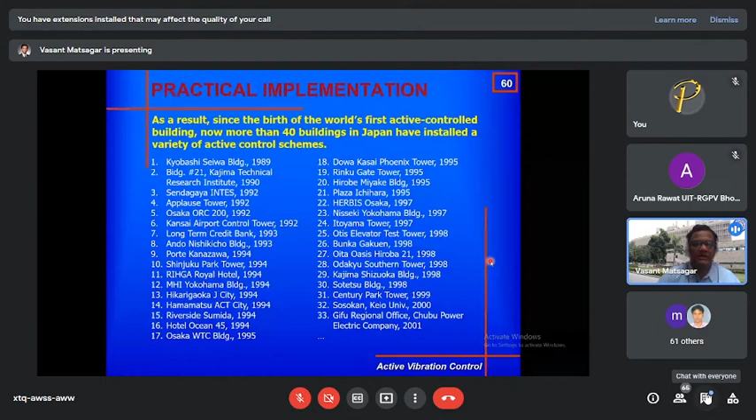So this is one sample list of buildings being controlled using these kinds of active or semi-active devices. When these devices are implemented in real life structures, there are certain practical ways of installing them. One way is you have an inverted chevron bracing, and then you have the damper placed there, and that damper has the semi-active property.

That is done by using development of some control algorithms, depending on which of these feed forward or feedback control, or open loop or closed loop system, that we have used. So I'm showing some examples of real life buildings where these kind of dampers have been introduced.

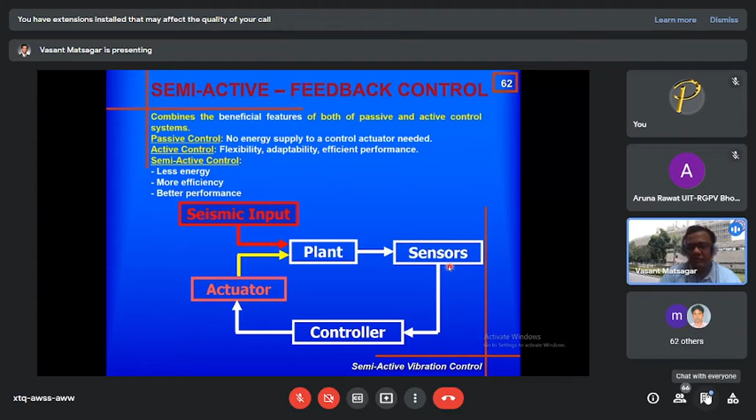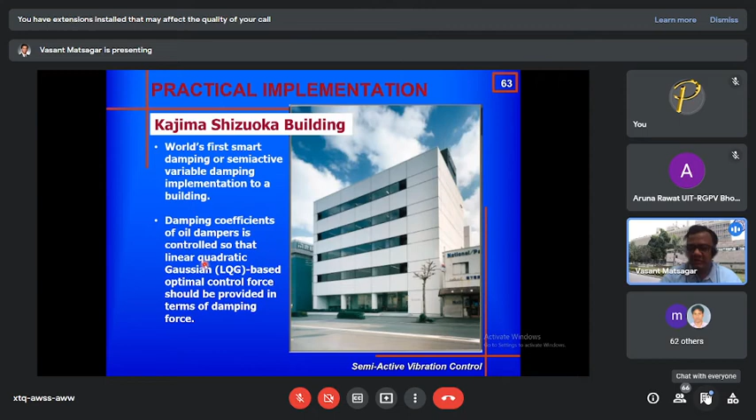Now this part, I will quickly go back to the previous slide. So that part is here. What kind of control algorithm has been used? Whether it is probability based or it is frequency dependent, what kind of gains it is using, what kind of input it is receiving, so on and so forth. But when we hear these kind of terms such as linear quadratic Gaussian, it means we are talking about what kind of control algorithm is there, which is controlling the response of the structure by changing the dynamic properties of the devices in real time.

And those semi-active hydraulic dampers generate the force to control the response of the structures in the transverse direction. I'm calling this the transverse direction, which is the shorter side. In the longitudinal direction, as of now, you do not see any response control as such. Now it is again the choice of the structural designer as to which direction response is to be controlled, depending on how the overall building layout is.

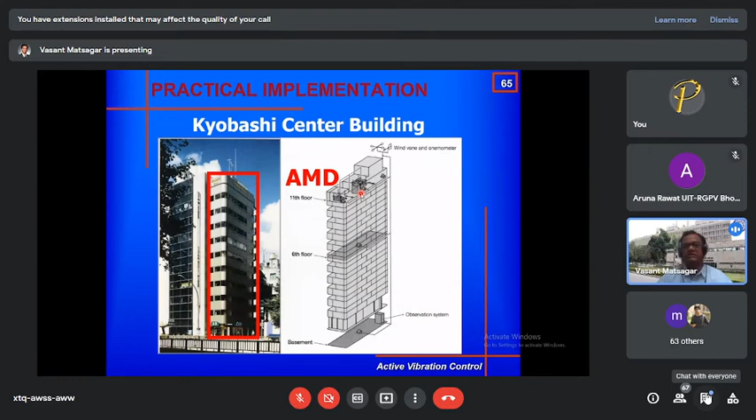So these mass dampers are essentially controlling the response in the shorter direction; in the longer direction it is not as much required. But in the shorter direction also, there are two locations at which they are applying the forces, such that they are also in a position to control the torsional response as much as required.

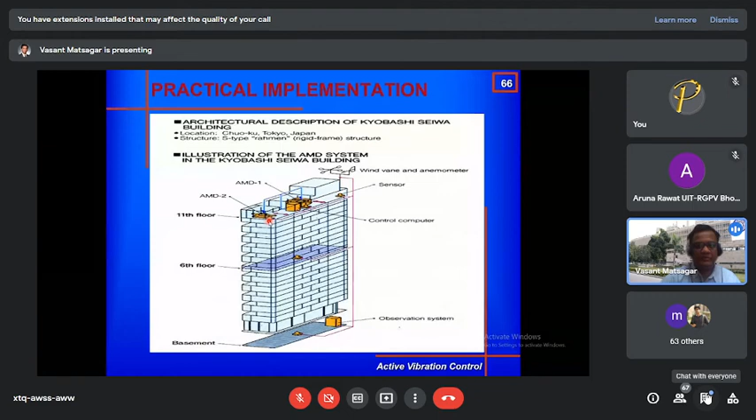So if we have a close look at that, you can see here, this is one active mass damper, this is the second active mass damper, this is the same figure from the previous one. And now let us see how the response takes place and how it is controlled.

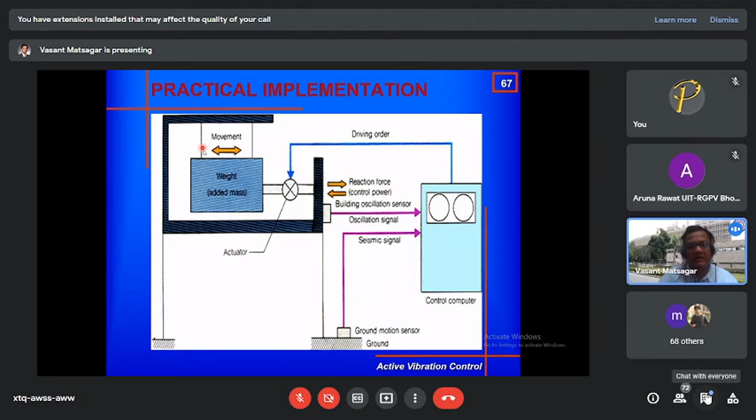And that mass can be changed. As I said, carrying the large mass on top of the floor becomes difficult, so they are carried in the form of small plates, and then the mass is adjusted, because mass and stiffness, these two quantities govern the frequency, and that frequency has to be tuned to the frequency in which we are controlling the response. So tuning the frequency means changing, somewhat similar to what we do in our radios. In our radios we have a tuning button, and we change the frequency of the diaphragm of the receiver so that there is the same frequency. In a similar manner here, we change the mass and ensure that whatever is the actual frequency of the parent structure in which we are controlling the response, it is tuned to that frequency. And that tuning can be done by adding some plates or mass or removing some mass here. So that option is available. Even some kind of steel balls are used just to play with the mass such that the exact frequency can be obtained.

Now we know that when we design a structure on paper, we calculate the stiffness and the moment of inertia, and its modulus of elasticity is assumed. Modulus of elasticity in case of a reinforced concrete structure depends on the grade of concrete. But when we actually construct the structure, the grade of concrete may vary. When the grade of concrete varies, it has a direct effect on the stiffness matrix. It means frequencies are different, meaning modal frequencies are different than what you have actually anticipated in your theoretical design.

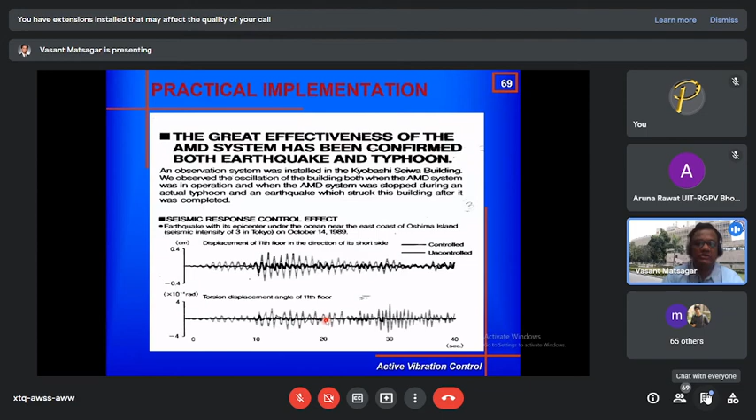But as I have said, in this particular building, the Kyobashi Seiwa, there is a possibility of torsional mode, and the torsional mode response is also controlled, shown here on the 11th floor. If that mode had not been controlled using this tune mass damper, the torsional displacement would have been as high as this. However, because of those two AMDs put at two different locations, they are also giving some restoring force against the torsional mode of vibration, and because of that, the torsional modal response has also reduced. So this clearly shows the effectiveness of using active tune mass dampers on structures in case of earthquakes.

So likewise, there are different examples. I think I'm running over time, but I will quickly rush through the rest of the devices and the practical implementation of those devices in the next 4 to 5 minutes. So this is yet another example building, again from Japan, where...

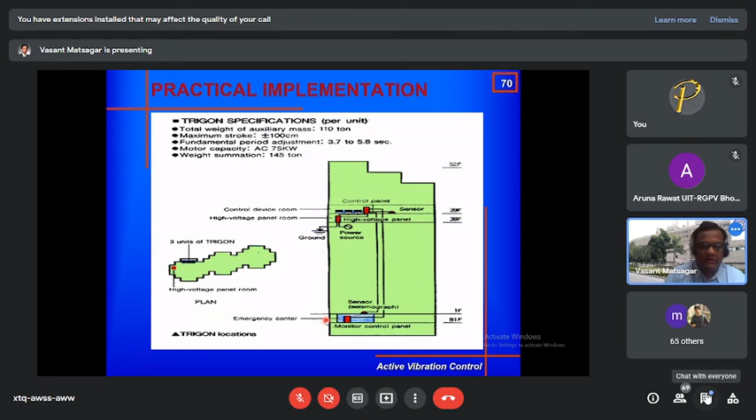The semi-active tune mass dampers have been installed. Apart from that, the dampers themselves have different kinds of arrangements for their function.

This is the practical formation or fabrication of a mass type of tune mass damper. This is the free mass which moves on these rollers, to and fro, because of its inertial properties, and thereby it applies forces on this framework, and that framework is connected to the floor.

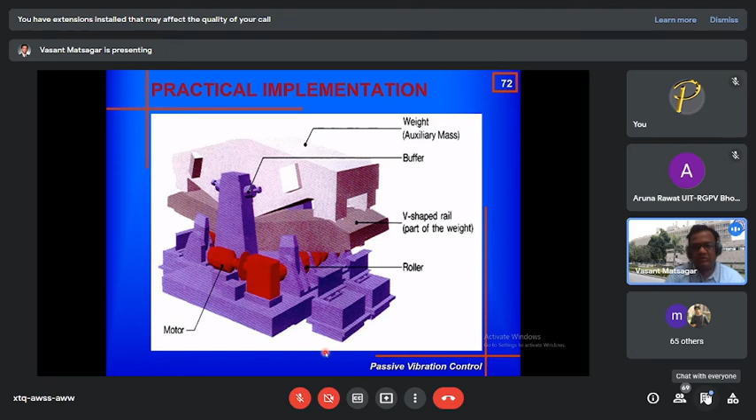You can see the elevation here. Because of the inertia, it moves on top of these rollers, and this is connected firmly with the building floor, and thereby it applies forces in the opposite direction. For example, when the building floor is moving in the leftward direction, this mass, because of inertia, is thrown backward, and thereby on the rollers a force is applied on the opposite side. It means on the floor there is a force being applied on the opposite side because of the inertial mass put on top.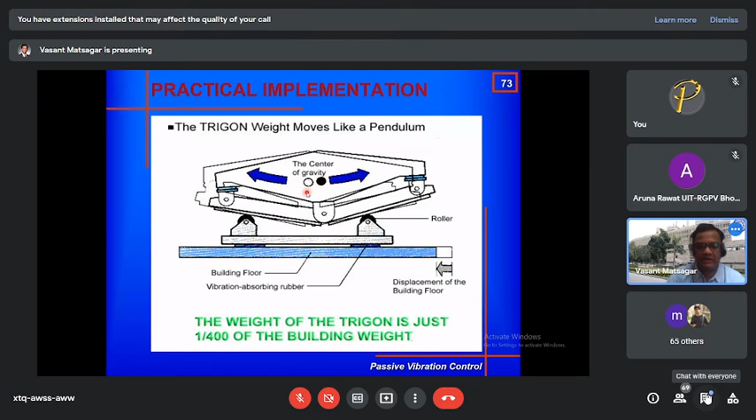Again, we need to calculate how much inertial mass is to be put based on how much force it is applying on the structure in real time. In this case, it is almost 1/400th of the building weight. The weight of this mass, which they have named trigon, is 1/400th of the building weight. Depending on how much weight we have put and the frequency tuning, we get the response reduction, shown in some of these figures.

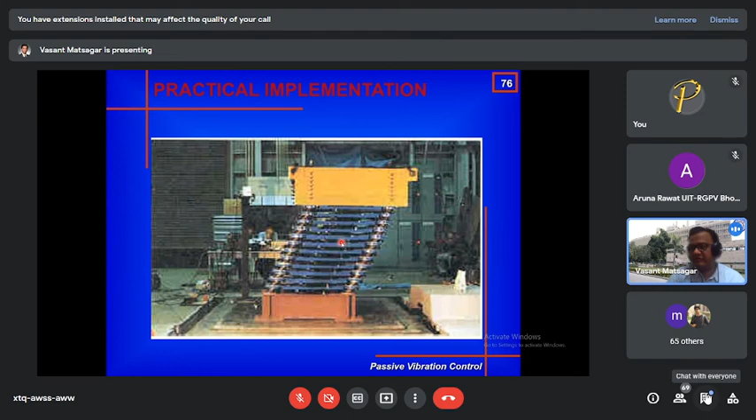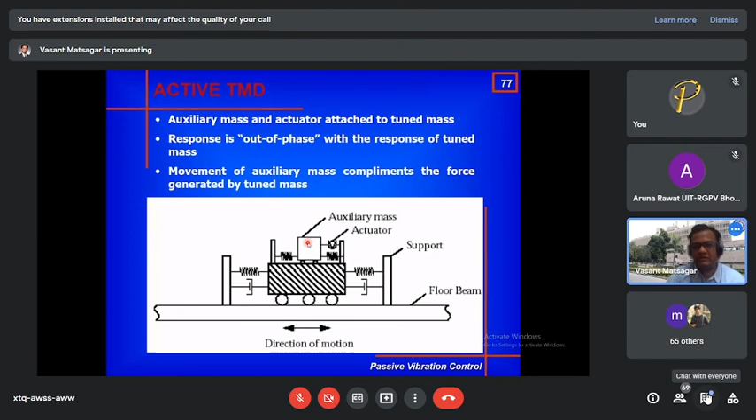Sometimes we need to also control the response of the tune mass damper itself, so we may have some additional features incorporated. Even in India, wherever we have used this tune mass damper, there are control forces applied on the tune mass damper. They can have another mass damper on top of it to control the response of the tune mass damper itself. So this is a schematic of those kinds of active mass dampers in two layers, controlling the response of the primary tune mass damper and the secondary tune mass damper. The primary could be a passive one, and the secondary could be the active one.

Pendulum dampers are more popular in tower type structures, such as the Chiba Port Tower in Chiba City, Japan. It has this kind of damper installed, and the weight of the damper is important. There are two dampers here, weighing 10 tons and 15 tons, and the building height is 125 meters. Please note they were incorporated in 1986.

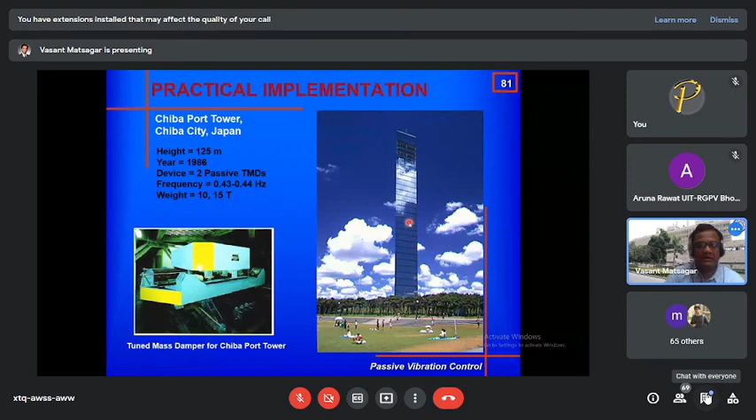As far back as 1986, they have been using these kinds of tuned mass dampers. In India, we are yet to use these dampers popularly, especially in tall structures. In the 1980s, Sydney Tower in Australia used a passive pendulum type tuned mass damper weighing 220 tons, a huge pendulum type damper.

The John Hancock Building has two tuned mass dampers of 300 tons each. The building was constructed in 1977, with a height of 244 meters.

Instead of installing one damper, we can have additional dampers, and those additional dampers may control the response in other modes as well. One damper can control response in one vibration mode. However, if you are interested in controlling the response in the second mode, or the third mode, for example, you may add an additional damper tuned to the frequency of the second or third mode. This is called the multiple tuned mass damper.

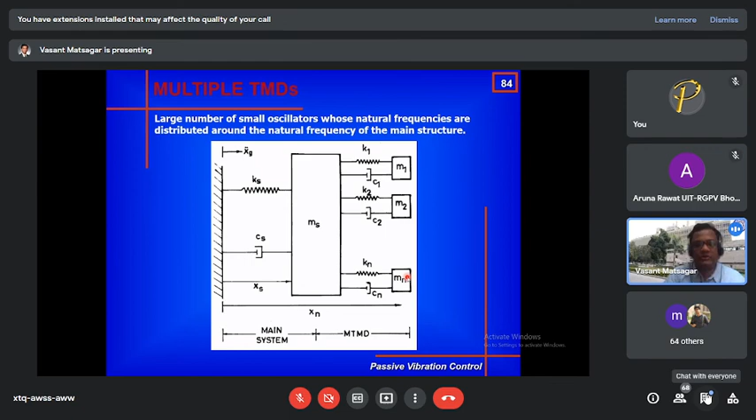There have been some structures where these have been installed. Due to paucity of time, I'm rushing through how active mass dampers function in controlling the response in two orthogonal directions in the planar sense.

The next category is hybrid control, where you may have different kinds of dampers combined, either semi-active and passive together, or two kinds of passive dampers together, or two different kinds of semi-active or active control systems together. This whole combination falls under the category of hybrid control.

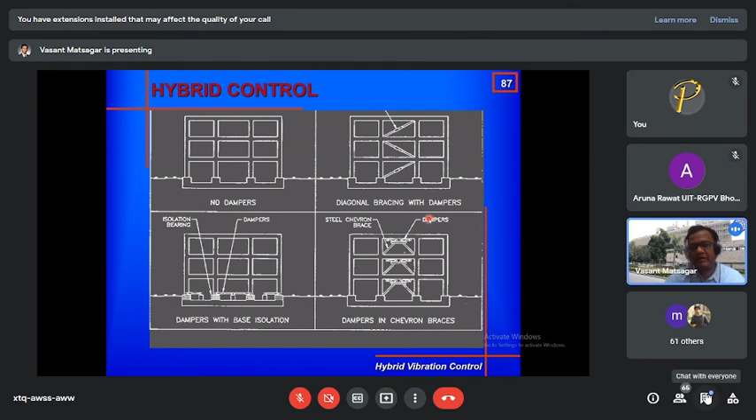For example, you have base isolation, and in addition you have dampers installed. So base isolation plus damper becomes a hybrid control. Or you have chevron bracings, which themselves help in response reduction, and in addition you have dampers. Likewise, there are different ways in which hybrid control can be installed.

There are some buildings coming up where some of these devices are being installed. This is yet another smart base isolated building with the addition of semi-actively controlled variable damping: the Keio University Soso-Kan building. This is one of the first buildings that is semi-actively controlled.

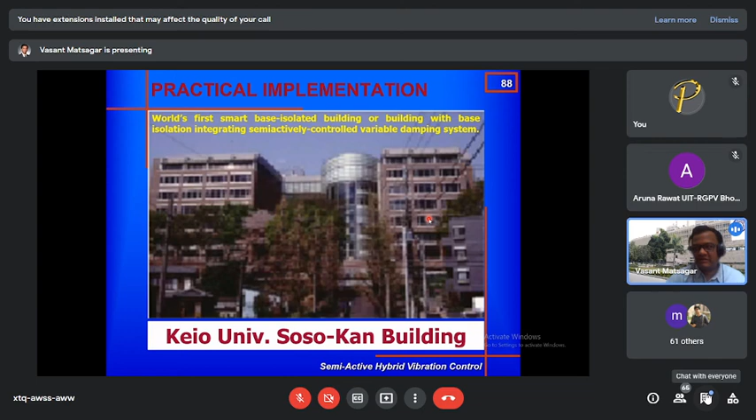There is another building controlled using autonomous decentralized semi-active smart damping, a very advanced kind of damper installed in a building in Gifu, Japan.

Here, the autonomous decentralized semi-active control works such that the response is controlled at different locations using different algorithms - it is decentralized. There is not just one single computer controlling the response of the entire system; instead, there are decentralized control algorithms at different places.

This is how the semi-active damper looks in real life. In this particular building, they have used a switching oil damper with a built-in controller, and this decentralized algorithm is very fascinating.

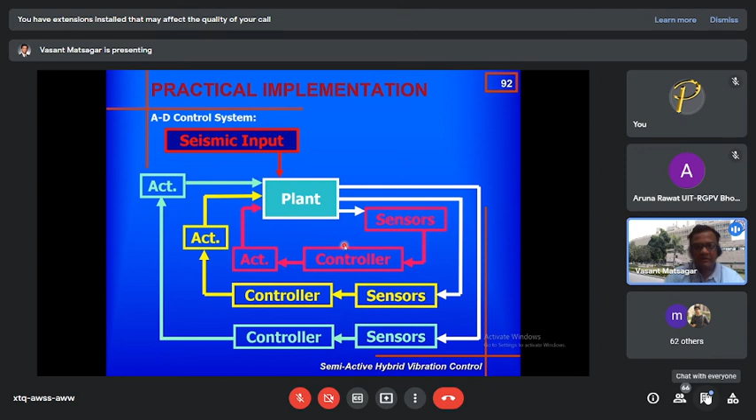If you can see here, this is the main structure, and there are three control algorithms: the innermost loop, the middle loop, and the outermost loop. There are different actuators in each one of them controlling the response of the structure, and sensors giving feedback to the control computer in all three algorithms. This has already been practically implemented.

These are the force deformation loops obtained there.

With that, I will quickly conclude my presentation. Structures are exposed to different kinds of dynamic excitation, either during ambient conditions or external forcing, either from base excitation, which is earthquake, or mass excitation, which is wind. Wind can be extreme winds or ambient winds affecting the serviceability of the structure. So vibrations can be induced from any one of these sources.

That vibration response can be controlled, reduced, or abated by different kinds of devices. These are some state of the art advanced devices or equipment which can be installed in the structure, which will not only improve the safety of the structure during extreme events, but also can be used for controlling ambient vibrations or improving serviceability. Particularly in long span bridges or tall structures, ambient oscillation control itself becomes important, and that can be achieved by using these kinds of devices.

The technological know-how of these vibration control or dynamic response control devices is readily available, particularly for the earthquake resistant design of structures. So with these concluding remarks, I end my presentation.

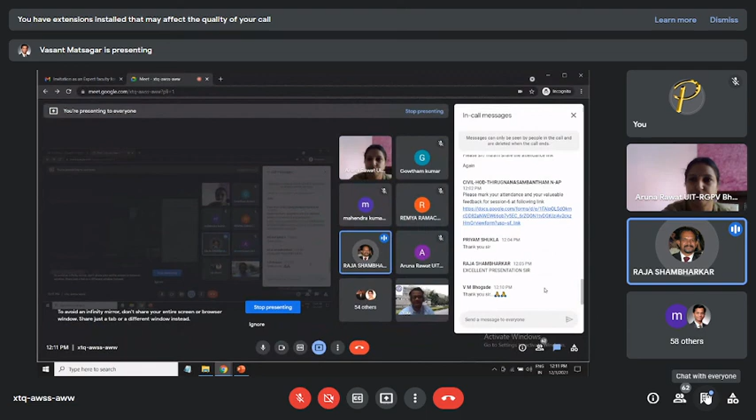Yes ma'am, can I ask a question? Yes sir, please. I am from the architectural faculty. We are referring to the IIT Kanpur earthquake tips. Sir has excellently told us regarding the passive, semi-active, and active parameters to withstand earthquake forces. But the question is for the masses, when people cannot afford the cost of construction, what kind of planning and designing features should we know so that we can teach the students, since we are referring to the earthquake tips as per the syllabus? What suggestions could sir give us so that it will be better?

It is a very pertinent and valid point you have raised. In tomorrow's presentation I will be talking about the practical implementation of one of these devices in the Indian context, which is cost effective, because specifically in India we are very much cost conscious. Out of these different devices I have talked about, I have just given a glimpse of most of these devices. Just to inform this gathering, we teach this as a full semester course on response control of structures, so you can imagine the vastness of this knowledge base, which I covered only within 2 hours. Out of this, in the Indian context, specifically considering cost effectiveness and whether we can afford these devices while still ensuring performance, not all these devices are applicable.